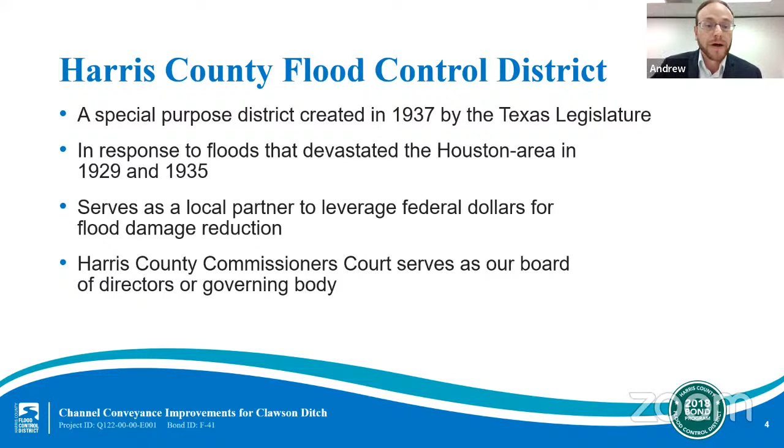The mission of the Flood Control District is to provide flood damage reduction projects that work with appropriate regard for community and natural values. One of the most difficult challenges we face is constructing effective projects that are sensitive to community and natural values in a highly urbanized area.

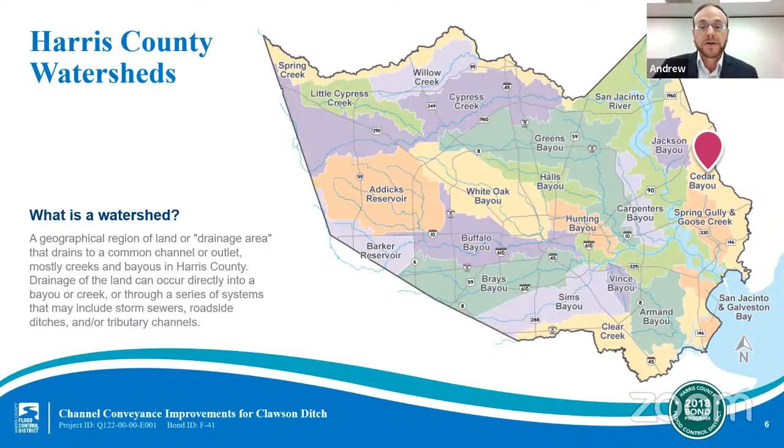Harris County includes 23 main watersheds, totaling approximately 1,800 square miles, and more than 2,500 linear miles of channels. That is approximately the distance from New York to California. Each watershed has its own unique characteristics and needs. Tonight, we're talking about a project in the Cedar Bayou watershed of East Harris County, specifically improvements to the tributary Q122 subwatershed, otherwise known as Clawson Ditch.

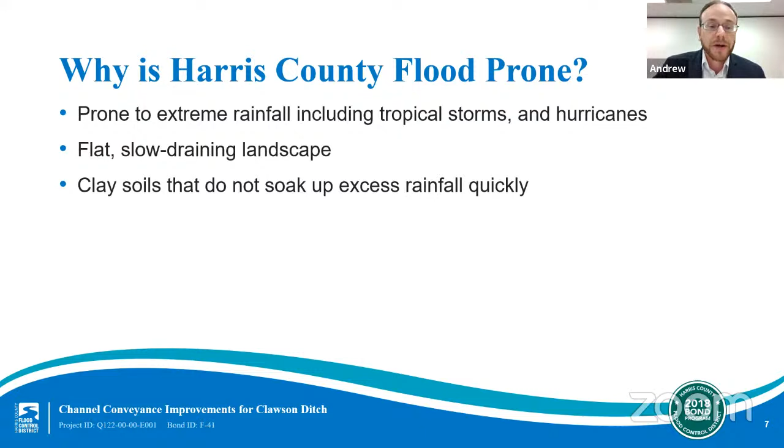So why is Harris County prone to flooding? Some of the reasons are the county is prone to extreme rainfall, including tropical storms and hurricanes. We have a flat, slow draining landscape, and we have clay soils that do not soak up excess rainfall quickly. These flooding issues become more apparent when combined with dense population centers and development that has occurred in our region. While the Flood Control District plays a critical role in flood risk reduction, we are one of several entities involved in these efforts in our region.

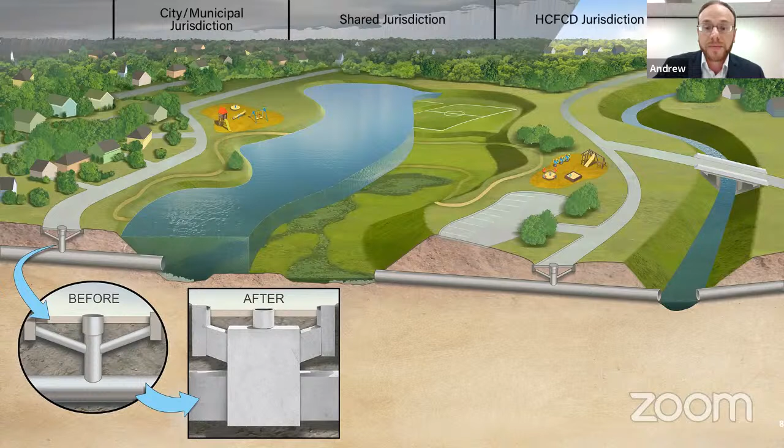Often we partner with Harris County precincts, utility districts, and others to add recreational amenities such as trails to these basins and along our channels. On August 25th, 2018, Harris County voters approved $2.5 billion in bonds for flood risk reduction projects. This vote followed a series of meetings across Harris County in each watershed, which resulted in a list of what is now 181 bond projects.

As of August 25th, 2021, every project included in the 2018 bond program has been initiated, including 8 projects in the Cedar Bayou watershed. A total of more than $1.35 billion in partnership funding has been secured so far to stretch the 2018 bond program even farther. The actual timing of each project will depend on a variety of factors, including environmental permitting, right-of-way acquisition, utility relocation, and in some cases, requirements of a particular grant. That said, project lists and projected schedules are updated frequently on our website.

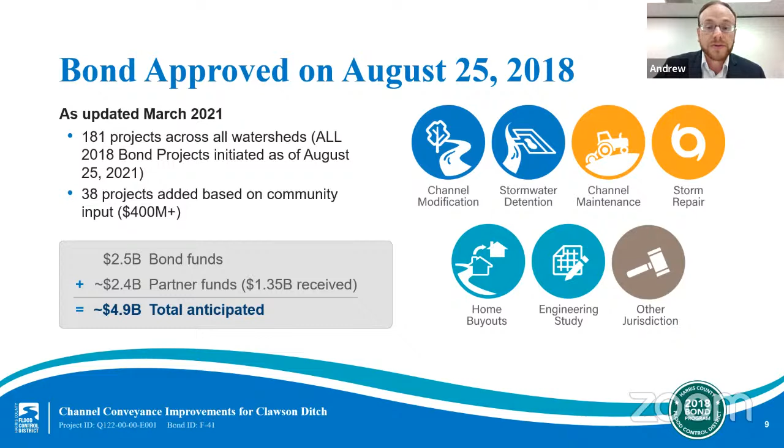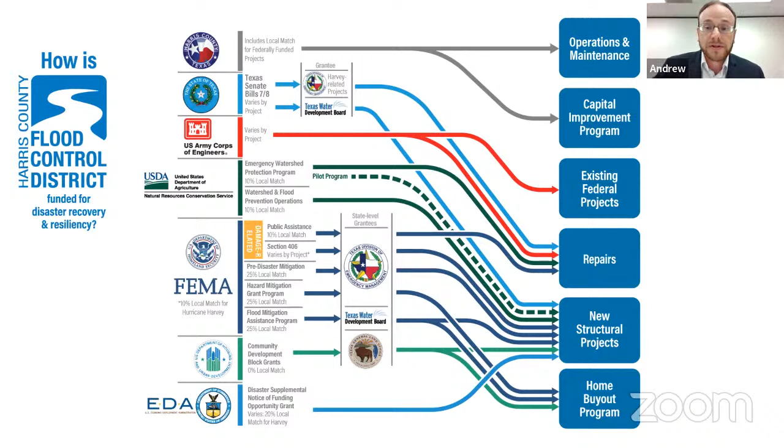While the bond was for $2.5 billion, the full cost of every project in the bond is almost $5 billion. So we made it clear from the outset that we would need funding partners to fully construct the projects in the bond program. As I mentioned before, we have had some success so far, having secured more than $1.35 billion in partner funds. And this graphic illustrates the many sources of these partnerships, including federal, state, and local funding that the Flood Control District is working to secure for Harris County. Each agency has its own definition of eligible projects and its own requirements for local match funding. So the Flood Control District works diligently to match projects to the right partnership opportunities.

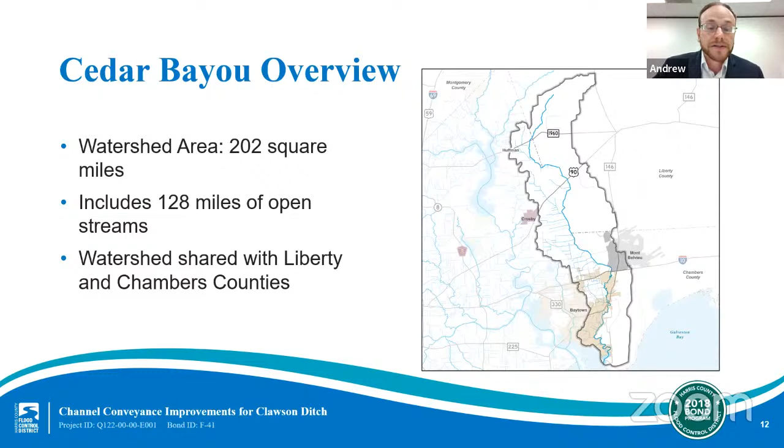The city of Baytown and areas such as Crosby and Huffman are located within the watershed, which encompasses nearly 200 square miles. Cedar Bayou flows in a southward direction from its headwaters in Liberty County to its mouth at Galveston Bay. There are about 128 miles of open streams within the watershed, including the primary stream and tributary channels. The main stem of Cedar Bayou is approximately 40 stream miles in length and directly impacts Harris County, Chambers County, and Liberty County.

Before we get into the details of this project, I want to take a few minutes to share some background information. In 2018, the Flood Control District completed the Cedar Bayou Flood Risk Reduction Study. This planning study investigated the existing flood risk within the watershed and identified potential future drainage improvements aimed at mitigating these flood risks. Out of this study, Q122-00-00 tributary, also known as Clawson Ditch, was identified as a priority subwatershed and selected to be included in the 2018 bond program.

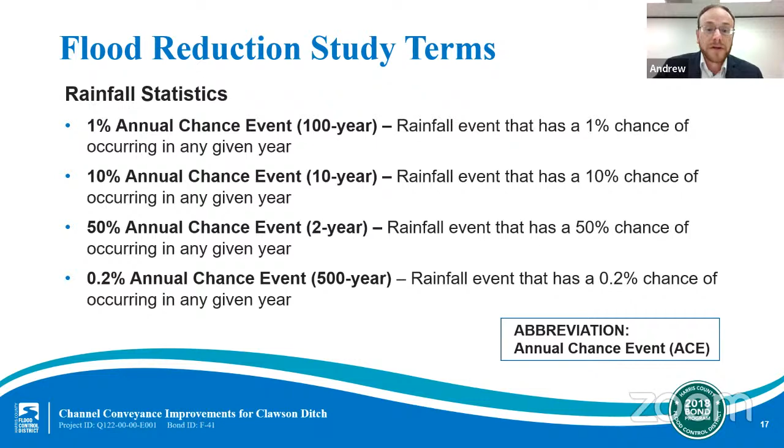I think it is important to remind you that the precipitation depths for each of these specified frequencies are based on statistical data, and they are not related to each other. For instance, a 100-year storm does not have 10 times the rainfall of a 10-year storm.

I would also like to go over some flooding terms. A subwatershed is a subset of the larger watershed. We refer to areas that drain from a tributary into the main channel as a subwatershed. Clawson Ditch is a subwatershed of the larger Cedar Bayou watershed.

Inundation mapping is used to identify the rising and spreading of water from the channel banks over the nearby ground, for example, stream flooding. This is not necessarily the same thing as a FEMA regulatory floodplain, which is based on inundation mapping, but also goes through a rigorous review and public input process to become a regulatory product for flood insurance purposes. You also hear the term system capacity.

System capacity refers to the flow carrying capacity, or how much water can move through a channel. For example, a system capacity of 100-year would mean the channel has the capacity to carry a 100-year storm event before it overflows its channel banks and begins to affect nearby structures. I want to reiterate that this project uses inundation mapping to identify current flood risk and to gauge the effectiveness of the flood reduction project.

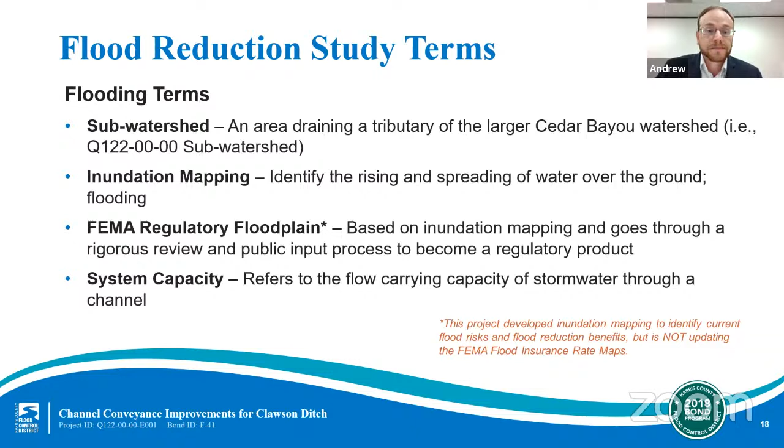Now that we have clarified some of the terms, let's talk about the existing drainage patterns in the subwatershed. As part of the PER, we performed a detailed evaluation of the existing drainage conditions in the Clawson Ditch subwatershed. Our investigation revealed several existing drainage issues, such as a shallow depth and narrow width in the Clawson Ditch channel, which gives this channel very little capacity and limits the ability for outlying areas to drain.

There are low-lying areas to the south and west of Clawson Ditch that are prone to flooding due to the elevations in the terrain. Flow restrictions at the FM 1942 bridge crossing result in overflows along the south bank of the channel that drain into low-lying areas southwest of FM 1942.

The Flood Control District has several flood risk reduction tools at its disposal that can reduce flood damage throughout any given watershed. Tonight, we are focused on the following flood reduction strategies within the toolbox: channel conveyance improvements, road crossing improvements, and stormwater detention basins.

When analyzing these flood risk reduction strategies, we looked at providing improvements ranging in system capacity from the 20% or 5-year annual chance storm event to the 4% or 25-year annual chance storm event. We'll now discuss each of these tools in more detail as they pertain to developing flood risk reduction within the Clawson Ditch project area.

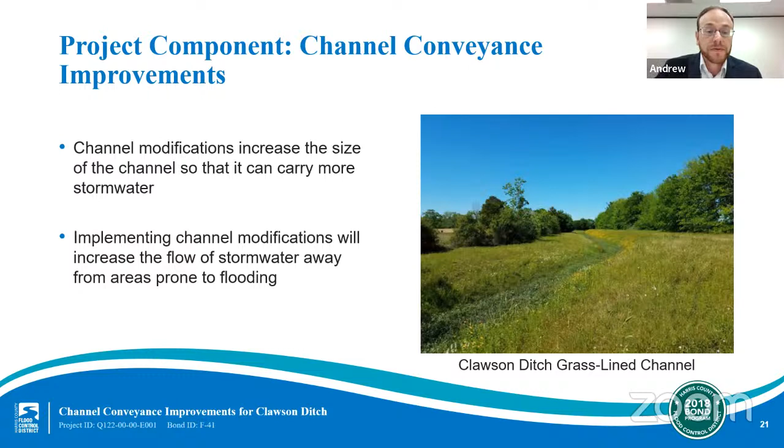Road crossing improvements are another flood mitigation tool at our disposal. Oftentimes, support pillars of bridges or crossings, as well as the roads themselves, can restrict the flow of stormwater, which increases the risk of flooding upstream of the crossing.

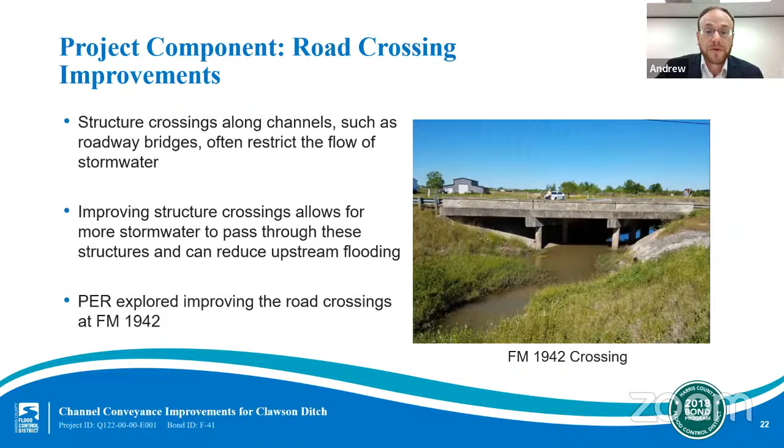These improvements focus on replacing, raising, extending, or otherwise modifying crossings in order to remove restrictions to the flow of stormwater. As you may recall when discussing the existing conditions, flooding exists upstream of the FM 1942 bridge crossing. During this preliminary engineering stage, we explored how improving the road crossing would address these upstream areas.

Stormwater detention basins are another structural flood mitigation method that create volume specifically for the purpose of collecting and holding stormwater during a storm event.

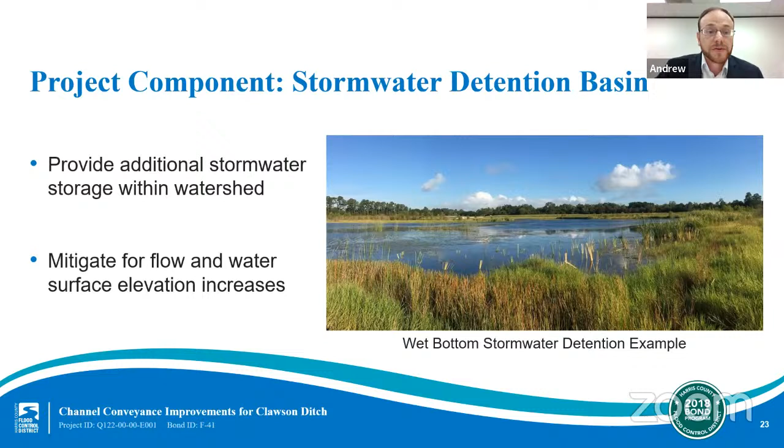We are utilizing stormwater detention in this project to mitigate the flow increases created by implementing channel improvements to Clawson Ditch. Without stormwater detention, the improvements would otherwise have the potential to cause downstream flooding. For preliminary engineering, we looked at implementing stormwater detention basins in the lower, middle, and upper regions of the project area. Now I'd like to discuss in further detail how the Flood Control District incorporates detention basins in our projects throughout Harris County.

A stormwater detention basin is built to store excess stormwater until it can make its way safely back into the channel and then ultimately out to Galveston Bay. There are several ways for stormwater to fill a detention basin, but it's important to note that all of our structures are passive designs that utilize gravity to operate them, so no mechanical gates or pumps are needed.

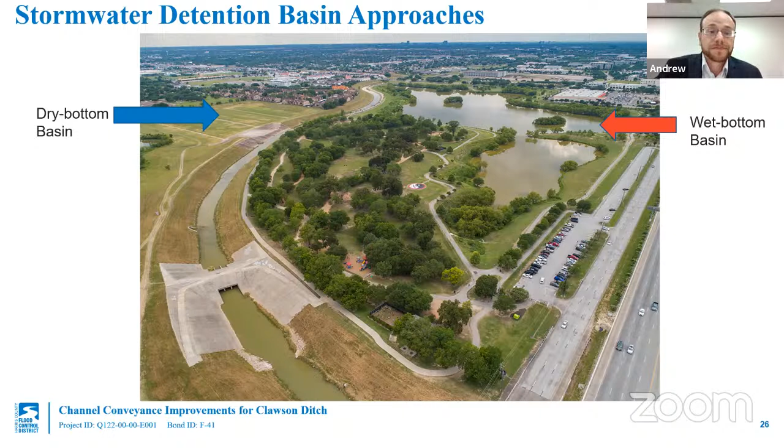Since we just touched on stormwater detention, I want to give you an idea of how much detention is planned for the area. A standard football field is just about 1 acre in size. Now think of that football field covered with 1 foot of standing water. That volume of water is about 1 acre foot.

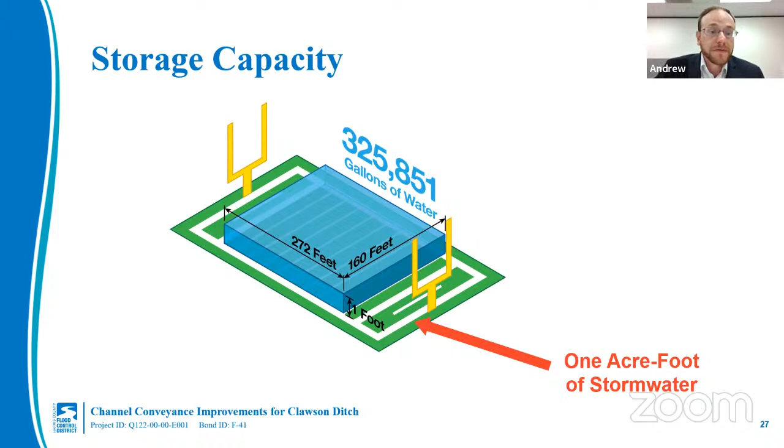The Clawson Ditch project requires approximately 170 total acre feet of detention. That is enough water to cover 170 football fields with 1 foot of water. Of course, these acre feet of stormwater will be stacked on top of one another across the basin footprint, meaning

we do not need a basin layout that is 170 football fields large. The team looked at a variety of potential flood reduction options, which included a combination of channel modifications, road crossing improvements, and stormwater detention when exploring ways to reduce flood risk within this watershed.

Based on the analysis of flood reduction performance and other considerations, the recommended improvements include channel modifications along Clawson Ditch to increase stormwater conveyance throughout the watershed, and providing approximately 170 acre feet of detention to temporarily hold stormwater during rain events. More project details will be available at the completion of the preliminary engineering report and will be accessible to you through the project website.

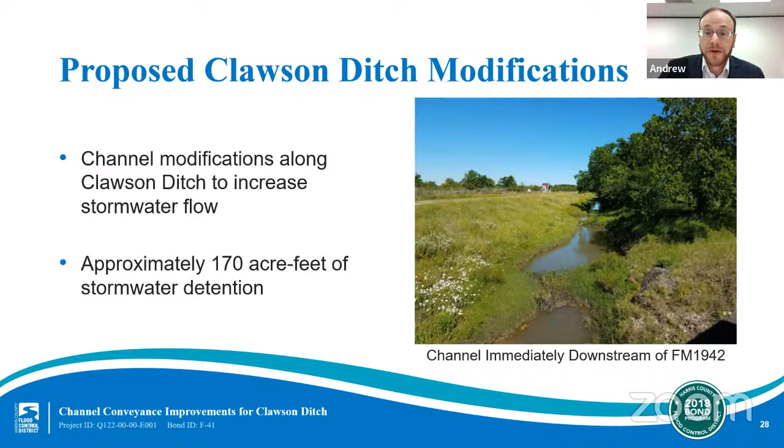We'll be reviewing the project schedule and project website location later in our conversation this evening. By implementing these proposed flood risk reduction strategies, this project will provide the following benefits during a 1% annual chance event, or 100-year rain event.

It removes inundation from up to 7 structures. It removes inundation from up to 66 acres of land, and it removes inundation from approximately 0.2 miles of roadway. In addition, this project will reduce the flow of stormwater entering the Cedar Bayou main stem during rain events, helping to reduce the flood risk downstream.

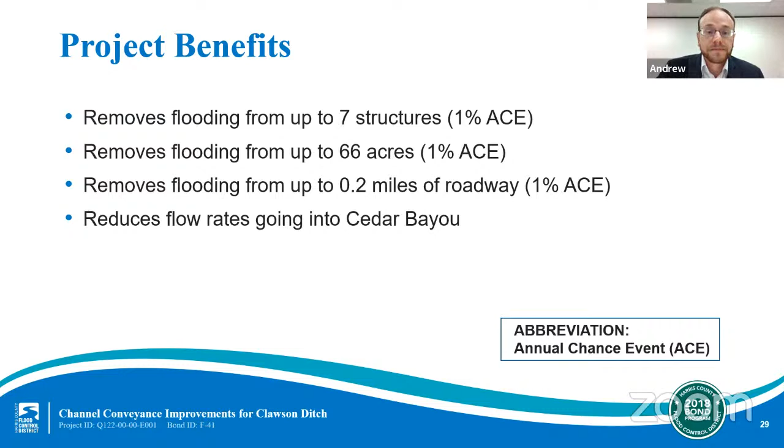The last thing I would like to touch on are the next steps. Where do we go from here? We are currently in the preliminary engineering stage and finalizing the PER. In the near term, the PER will be completed and approved by the Harris County Commissioners Court. We anticipate the PER will be completed this fall.

Upon completion of the PER, our team will begin initiating the required right-of-way acquisition. Once these activities are initiated, the Flood Control District will host an early design community engagement meeting to share the details of the proposed project.

The final design stage includes the development of detailed construction drawings and specifications that will be used to construct this project. We currently anticipate the design stage to be completed in the winter of 2023.

Once final design is completed, the team will initiate the environmental permitting with the U.S. Army Corps of Engineers that will be necessary to meet regulatory requirements. Once permits are obtained, construction of this project can begin. At this time, we anticipate construction to begin in the fall of 2024.

With that, I would like to send it back to Robert to close out the presentation and take us into the question and answers portion of the meeting.

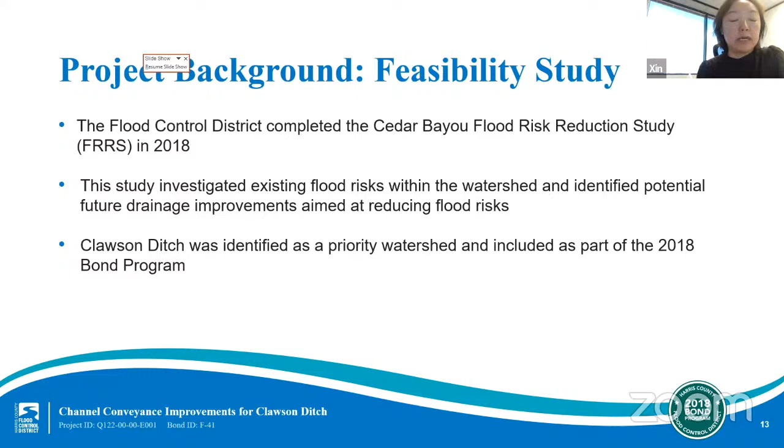So the Cedar Bayou Flood Risk Reduction Study, referred to as FRRS, is a planning level study that was conducted and completed in 2018. In that study, we looked at the existing flood risk throughout the whole Cedar Bayou watershed, collected data on drainage boundaries and channel conditions, and came up with high-level flood reduction concepts for the whole main stem, including the 18 tributaries, which include the Clawson Ditch, our focus project here today.

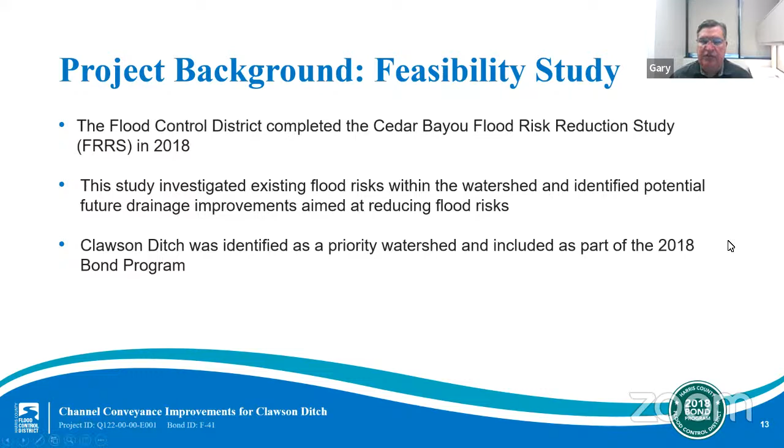As Xin mentioned, in 2018 the Cedar Bayou Flood Risk Reduction Study was completed. That study was basically a feasibility or planning study that looked at the entire Cedar Bayou watershed to determine where flooding problems were and the severity of those problems, and to come up with recommendations on future studies. When that study was completed, the Clawson Ditch, or Q122 channel, was identified as an area within Cedar Bayou that needed further study.

Since the planning study was complete and had some general ideas on improvements, it went to the PER process. The overall goal of this channel conveyance improvements project for Clawson Ditch was to analyze different flood risk reduction alternatives and provide a recommended drainage improvement project within the subwatershed, looking at various alternatives that provide flood damage benefits, then recommending one to move forward into construction. So we go from this funnel of looking at the entire watershed to focusing on a specific subwatershed, in this case Clawson Ditch, and ultimately try to come up with a project well-defined enough to send forward to construction. As part of this preliminary engineering investigation, the team looked at a variety of mitigation measures to reduce flood risk along Clawson Ditch, including channel modifications and improving the FM 1942 bridge crossing. Finally, to ensure that our design doesn't move flooding from one area to another, we had to consider stormwater detention basins at various locations to make sure whatever is recommended would not result in downstream impacts.

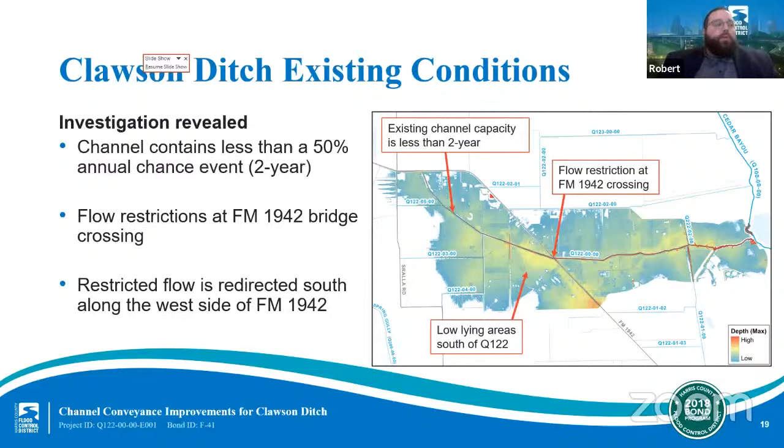Right now we're a little too early to know what right-of-way is needed and where it will be needed for this entire project. As the preliminary engineering report is completed, we will be reaching out to property owners for any right-of-way we determine is needed. Right-of-way could be needed for the detention we've discussed, as well as any channel improvements outside the existing flood control right-of-way and easement. As we move through that process, we'll provide information showing the extent of the right-of-way and coordinate with local property owners once that process is finalized. So right now we're just a little too early to establish all those limits and where exactly we'll need additional land to construct the Clawson Ditch project.

All right, thank you, Andrew. Our next question for this evening is for Gary. Gary, can you provide us with specific details of the projects that you will be implementing in Clawson Ditch?

Thank you for the question. At the moment, the Flood Control District is analyzing the data gathered in the preliminary engineering stage. We're working to identify various projects that, when put together, will reduce flooding throughout the Clawson Ditch area. We're trying to balance those projects by looking at the benefits and costs of different alternatives, specifically channel conveyance improvements and stormwater detention, which were the key anchor projects identified in the previous study. However, we do not yet have a completed project analysis to say what the specific project components will be. Our goal is to provide an update once we're able to iron out the details.

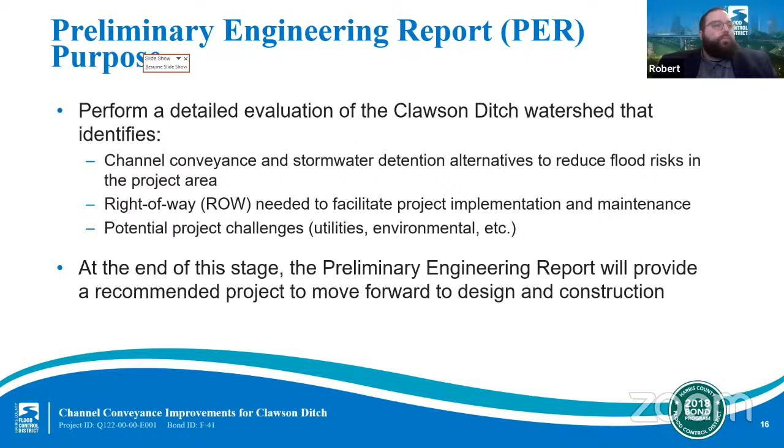Thank you, Robert. As Gary mentioned, right now we're in the preliminary engineering report phase. In this phase, we're looking at existing conditions and understanding the existing flood risk and the causes of those flood risks to the area, and then weighing the hydraulic benefits of different alternatives, such as stormwater detention, channel projects, or a combination of those, to ultimately achieve our project goal.

During this phase, we're looking at different alternatives, either individually or combined into one option, and weighing all the factors that could influence the project, such as utilities in the area, where we can acquire right-of-way, depths of the channel, and environmental considerations. So we're looking at different alternatives, weighing all the potential factors and impacts, as well as the benefits of each alternative, and ultimately recommending one project for implementation.

So right now we're in that phase, looking at all these options and weighing the impacts and benefits. And we're anticipating to complete the PER this fall. And so once we're done with that, our team will start looking at the right-of-way acquisition phase, contacting property owners as needed. And once these activities are initiated, we'll host an early design community engagement meeting, as Gary mentioned. And that's going to happen this winter or spring of 2023.

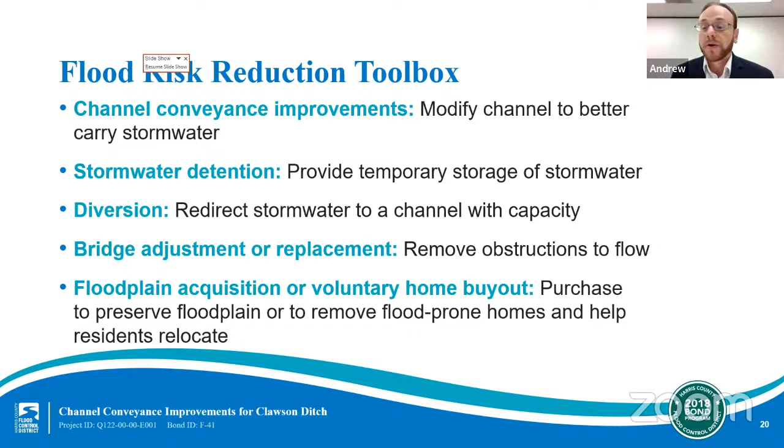And that's going to share the details of this recommended project. So we'll show sizes, locations, and the full benefit of the recommended project. So then the final design stage includes the development of the construction drawings and specifications that are going to be used to actually construct the project. And so we anticipate the design stage is going to be completed in the winter of 2023, with construction following that in 2024.

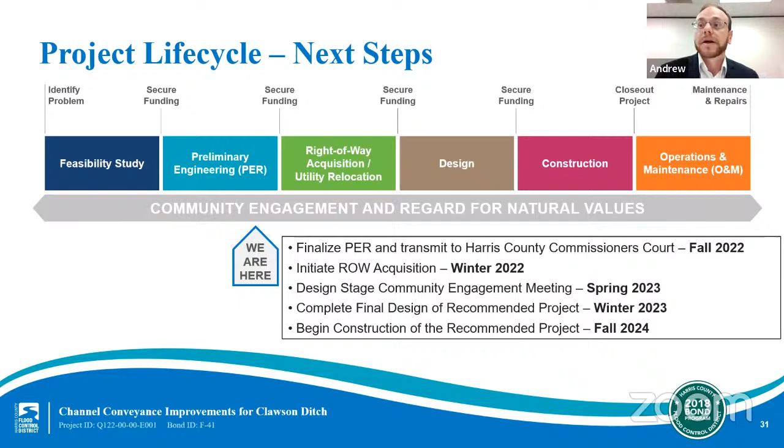All right. Thank you, Andrew. Our next question is for Xin. Xin, what are the benefits of this project, and what is the purpose of this project?

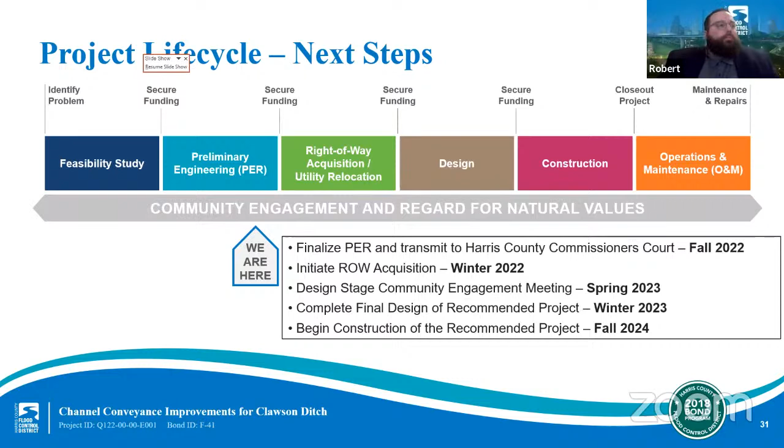Thanks for the question. So as my coworkers mentioned, the current stage for this project is under PER, which is, we are wrapping up that analysis to figure out the final recommendation and also finalize all the details for the benefits. So we don't have that specific information available until we finalize the PER, but I can state a little bit what kind of benefits we're looking at.

For example, we're looking at the floodplains area. If we do the channel improvements and detention basin, how much in floodplain reductions we can provide. So we're shrinking the floodplains in the area. And also we're looking at the number of homes that will be removed from the floodplains. We have analysis based on home elevations, comparing what the proposed floodplain level will be, and then we can lay out the maps and see how many homes will benefit from that.

And another metric we are measuring is the miles of roads removed from the floodplains. So there are many factors, as Andrew mentioned earlier, that's the metrics we're putting into the considerations among all the alternatives, and we will select the most feasible for this area. And as we're moving forward and finalize the PER, we will have more detailed data available.

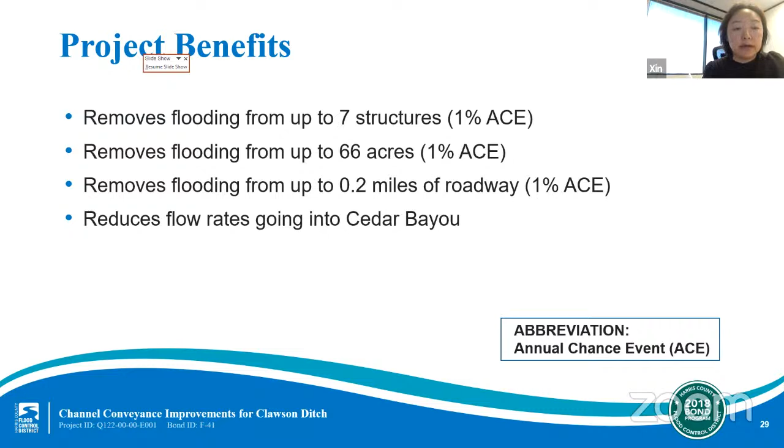And always the purpose of the project is trying to reduce the floodplains and flooding along the Clawson Ditch for the area. Thanks for the question.

All right, thank you, Xin. Our next question is for Gary. Gary, Josue asks, what is system capacity? Yes.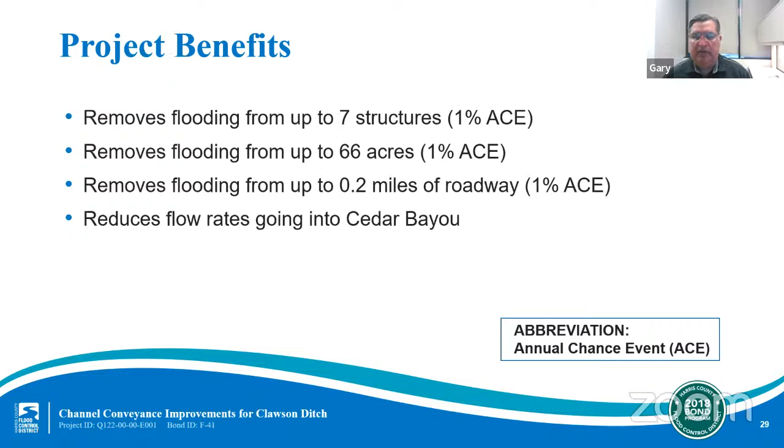It probably takes a little bit of a holistic look at a watershed, but when we talk about a system capacity, typically we're talking about a channel system capacity. And so a channel system capacity is basically when we analyze an open channel, any particular bayou, how that channel can convey flows is a function of two factors. One is how big is the channel itself? And two, are there any restrictions such as bridges, pipelines, or areas where naturally something restricts the flow?

So as planners at the flood control district, we are always trying to keep information countywide about what is the capacity of a channel system. The way we analyze that is, earlier in the presentation we talked a little bit about the various different flood frequencies. And so when we talk about a 100-year rainfall event or flood event, by design, there is a specific amount of rainfall, a rainfall pattern that we use to associate to the 100-year.

When we say a 10-year rainfall event, there's a certain amount of rainfall and a pattern that we use to be able to analyze what would happen if that amount of rain were to fall, in this particular case, in the Clawson Ditch area. And so when we talk about a channel capacity, we're looking at, once the rainfall gets into the channel, how much can that channel carry?

So if a channel has a 10-year capacity, then we'd say that if a 10-year rainfall event occurred and all the water was able to get to the channel, that channel would be able to carry it.

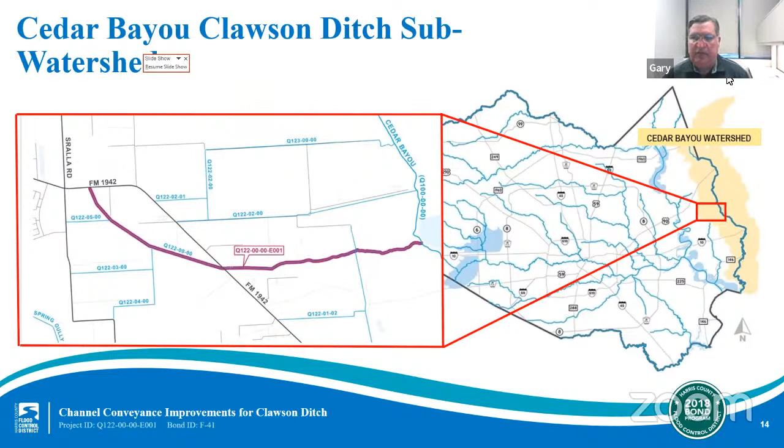And our side, the capital side or engineering side, is to design projects that provide flood control benefits so that the channels can handle more flow. There's less flow that's going to flood areas or flood homes. We have a maintenance team, and they basically inspect the channels on an annual basis to look for cleanouts or erosion problems or anything that they identify that needs to be cleaned out or maintained.

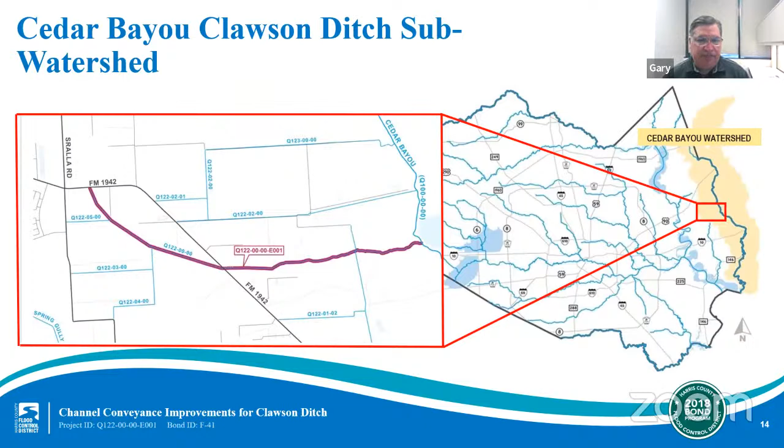Now, if you, as a resident in a particular area, see something, you can go to our website, and I don't recollect the phone number, but we can probably post that later. But you can go to our website at hcfcd.org and type in service request. And when you get to that web page, it'll tell you that if you would prefer to call in, you can call in, or you can type in a service request.

So when we receive those service requests, our maintenance team will send a property manager out to wherever the service request directs them. And they'll take a look at that area and make a determination if that's something that we need to do or can do. One of the things our property managers have to identify first is, do we have property rights for wherever this particular service request was sent?

In some areas, some of the bayous are privately owned, or they're outside of flood control's right of way. And we can only do work where we own right of way. So if it's something that they identify that we want to do, we'll probably have to go obtain property rights or permissions to get into the channel. And they make all those determinations.

They will then respond back to you if you provided that service request. And then the process becomes that they put that into the next package. And then at some point, when that project's priority elevates to the top, it'll get out and be done.

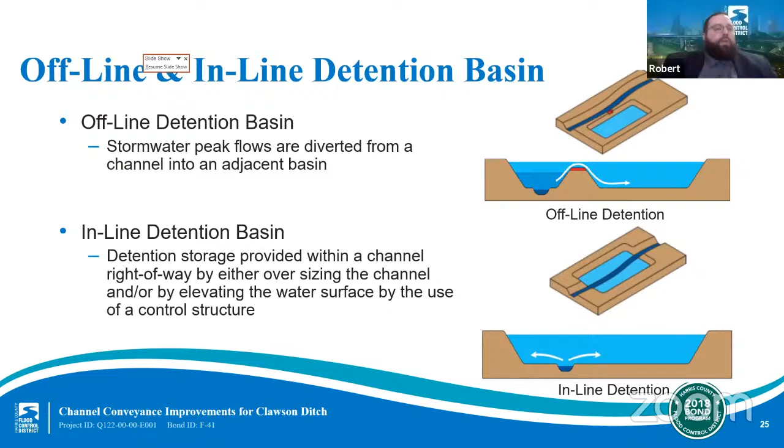All right, thank you, Gary. With that, one final reminder that we are continuing to accept comments and feedback on this project through Thursday, July 21st. We also encourage everyone to get flood insurance, as flood season in Harris County runs year-round.